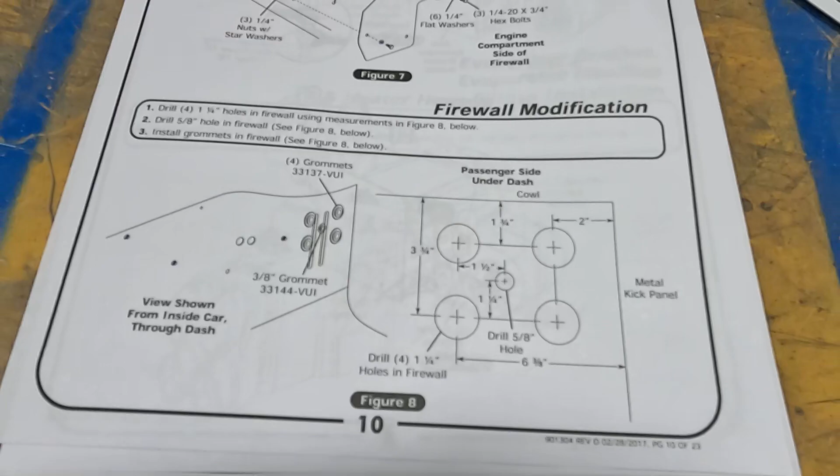Yeah, all right, yeah, there's the—I think this is what you sent me online, Doug, and I was like, I really can't do my measurements from that. I thought, what Dad said, there was a template that you actually laid on there and drilled out your holes. I thought that's what would come with this paperwork, but nope, it's just measurements. Yeah, I downloaded these instructions from the website.

And that's what I thought we could do, but I thought we're never going to be able to print it out to the right scale. That's why I didn't mess with it. I know, that's why we've been waiting to get the kit, but it looks like it's just...

Yeah, the rest of this is just the installation. If we do the firewall cover, I guess let's go back a page. Yeah, did you see something else we might need to do beforehand? You went back to it.

Okay, let's see—there's the dash, OEM control panel, OEM fresh air duct, this. That we can do later, up in the ducts and all that. But that front evaporator bracket, we probably need to put that on, and then make sure that's going to go through.

Is that the big plate that we just put on there? I think I remember doing that on the Mustang, maybe? Yeah, that's probably it—the big plate that goes on there, and then you screw that through, maybe through to this one on the outside.

Okay, what's this one here? This is silicone, on the back side of that firewall cover. Yeah, it's that thing—you flip it, silicone it, and then flip it over onto it.

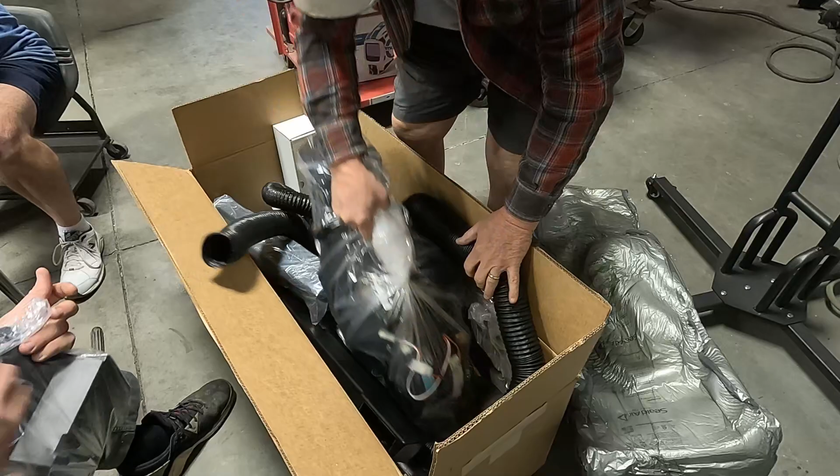On the workbench, install evaporator rear bracket and heater hose fitting. Properly lubricated O-rings. Well, I don't know that you need to do the heater hose fitting. No, but those little bitty short pieces of tubing, you can hook that up.

I mean, you can't put that on here. Yeah, but why lubricate the O-ring and have it sit for a year? True, I'm not saying you do that. What are you trying to say about my restoration, Doug? It's gonna take another year at least, before you're putting this on.

With properly lubricated O-rings, install front mounting bracket onto evaporator. Get this off of there. Okay, so where's theirs? Okay, there's the rear. That was down at the port.

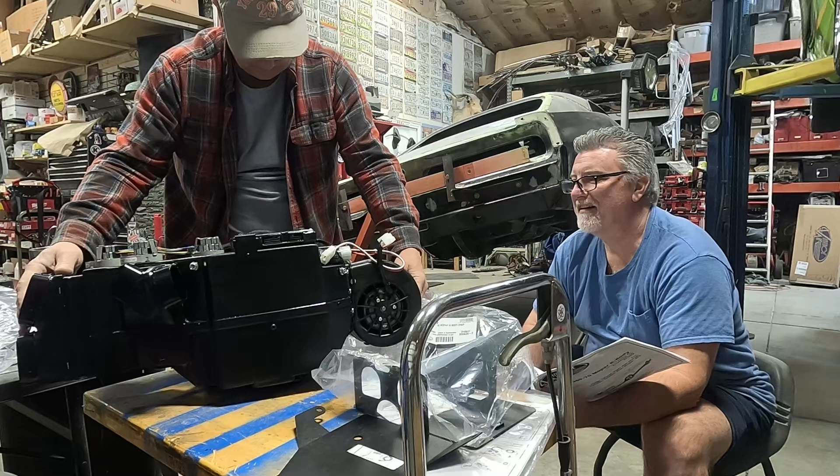Okay, this is the front side, so this is the back. I'm thinking this clamp somehow goes. All right, on a workbench, install evaporator rear bracket.

Looks like that hole lines up and that hole lines up. Sure does, this is the rear bracket. I was way off, what is the rear bracket? That's the rear bracket. This is the front bracket. This is the rear, okay. Well, turn it around.

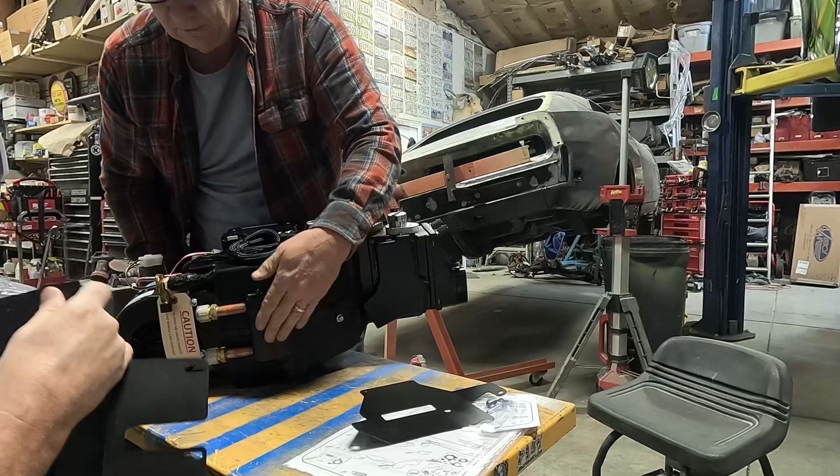Okay, are those metric or are they quarter inch by 20, half inch hex bolt? Yeah, but it's not a half inch, I think it's 3/8. It might be, it says half, quarter inch by 20, 3/8. That's the thread, yeah, 3/8.

Do you want the electric or you want to just do it by hand? We can do it by hand. Okay, yeah, it's plastic, you don't want to over torque it. So it was loose, go ahead and take that out.

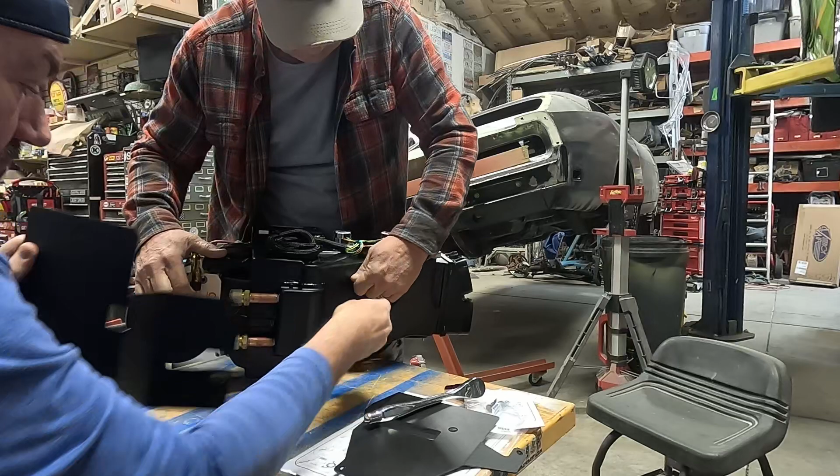Alright, give me a marker. Any kind of lock washer or anything go on these? Nope, it just shows them, the screw, pull them straight out in and screwing them back in. Okay, cool.

Oh, is the camera running? Yeah, so this is what we're doing now, installing this rear evaporator bracket.

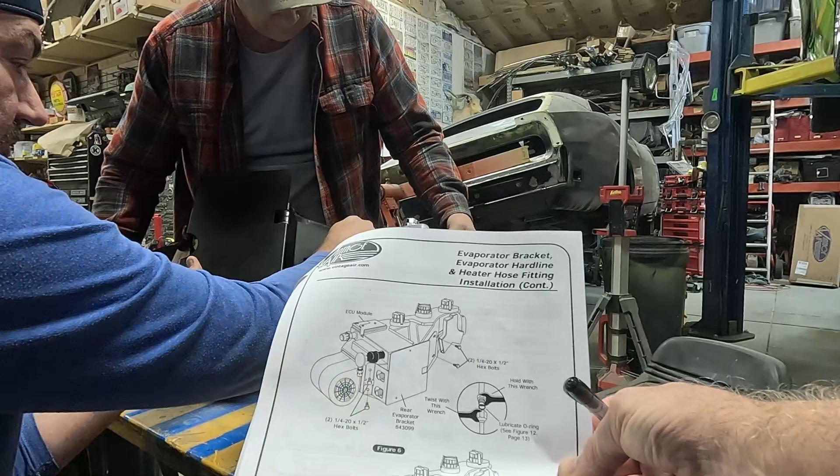Oh, that feels like it's cross-threaded. I don't like that one. It might not be. Yeah, it's going right in there. So let's just... I don't know if that's pointed on us or not. There we go. Much better.

Oh, the kid laid it down like that. You got another screw? Yep. It's like that will squeeze together. Yeah, I think it's got plenty of room to compress.

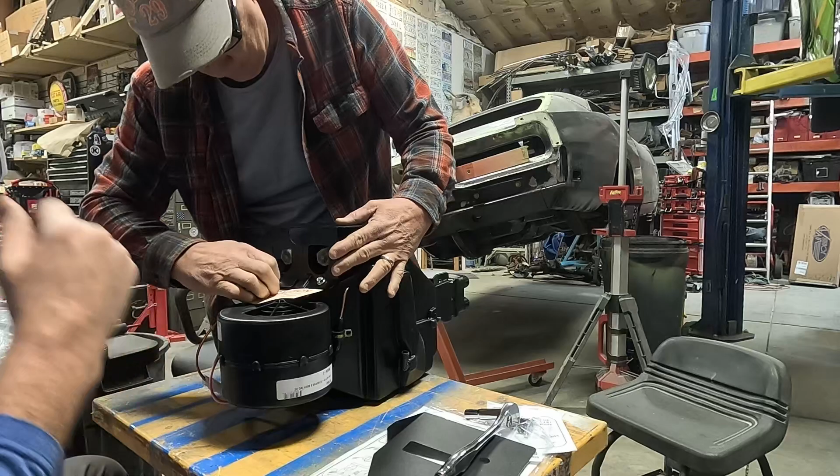Now we may need to take this off to put the hoses and fittings and all that, but I'd rather have this on. It actually shows putting them on before, after the block off bracket. But you can, well I was gonna say if you don't want, because that step does say install the bracket and then install the fittings with the properly lubricated O-rings. This is not, I think it might be cross-threaded. Oh, well.

There, now I moved it down. Thought you had it in there. Well, it started, but it's like, I don't know, we've got to maneuver it. No, not starting. I'll let you maneuver it.

Get off of me. No cursing at Clark's place, Doug. We're wholesome Christian boys. Crap. Shit, it's sliding. What are you doing over there? You about to bump it?

And now you got fingerprints on it. Well, but where you're gonna cut, I think yeah. It's still really wet, gosh. I finished a different project. Doug has to ruin it while it's wet. I was reaching to get this so you can see. I'd rather not see fingerprints in that. My project over there. Whatever.

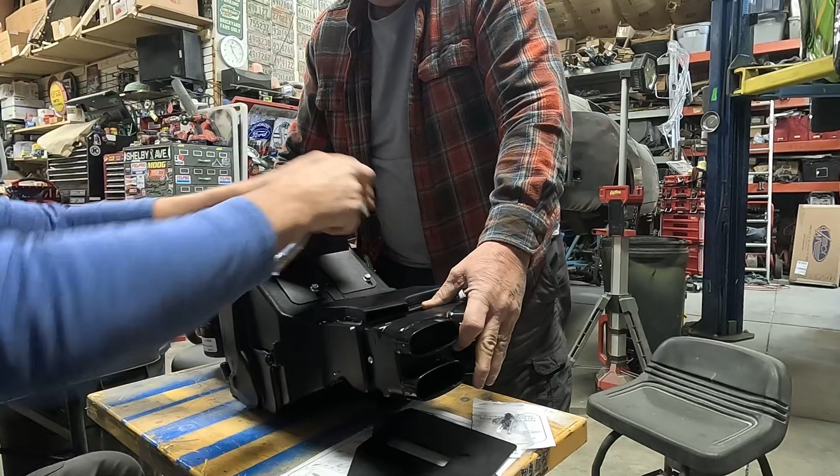All right, give me the damn... front bracket in. Now, how's this guy go? Hang on, let me get back to that page. I'm thinking that seems like those holes are close, but maybe that needs to flex a little.

You tell us. All right, install front mounting bracket on the evaporator. Okay, this is the evaporator control module, right? Yeah, and this plugs into that underneath your dash. The two things, are they down away from it, or are they closest to it?

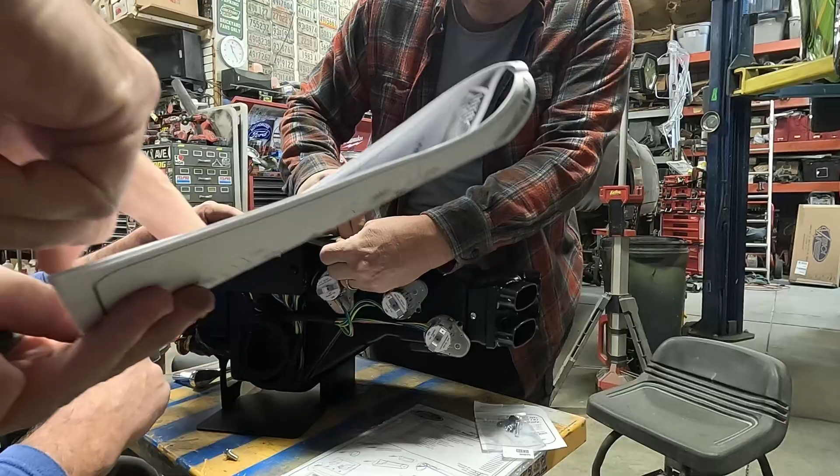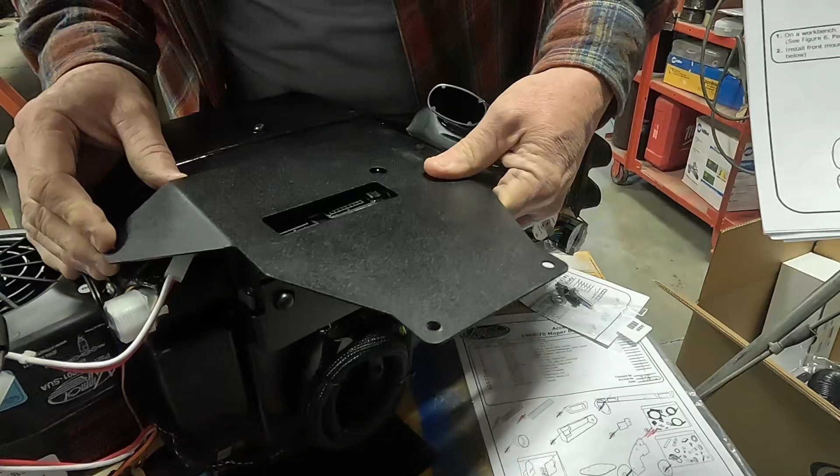Oh, you know what, I bet it goes just like that. Like that. There you go. Yeah, the opening looks like it goes. Let's see, looks like here, you can do that down. All the harness, everything plugs in through there. So yeah, your harness and everything there fit through that opening. Gotcha, looks good. And looks like you need to flex it a little bit to get it in there too.

Yep. Pop? Okay, that's not it yet. Oh, where's got that? Take the little pliers and just bend it a little bit, pop. Yeah, see, it's that screw. It's not centered over that hole exactly.

Well, right, maybe flex that a little bit. Yeah, that's the side that needs to be flexed. There, take that out, and I'll flex it real quick. I'll flex on you.

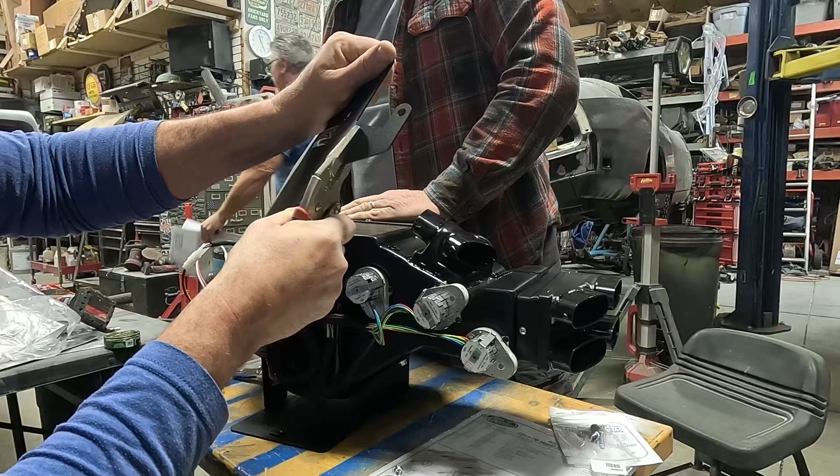Where'd that speckle paint? Spray paint, can you put it in front back? Yeah, it's on the shelf there. I was gonna retouch up my fingerprints. I don't need to be, don't need any DNA on me over there.

Okay, I kicked that up off of this. Yeah, it did. Let me get just a smidgen. And now our other hole is... you know what, let me flex this a little bit too.

All right, might be enough to get it where it's up off that. Where'd the other screw go? Should be right here. There it is. Sweetness.

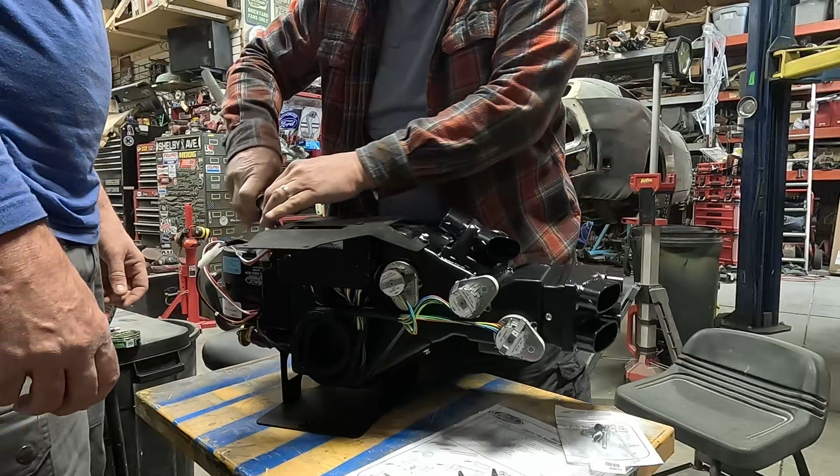Do it to it. Right in there, huh? All right, so do you want to put this? Whoa, that looks off. Look at this. Oh, no, never mind, never mind.

Do you want to go ahead and put these fittings on? No, I'm not putting fittings on because this is going in to the firewall. We're gonna see where it holds all the line, we're gonna get the plates in the front, whatever needs to happen, and then we're pulling it all out and painting the car. This mounts to your dash, all right, cool.

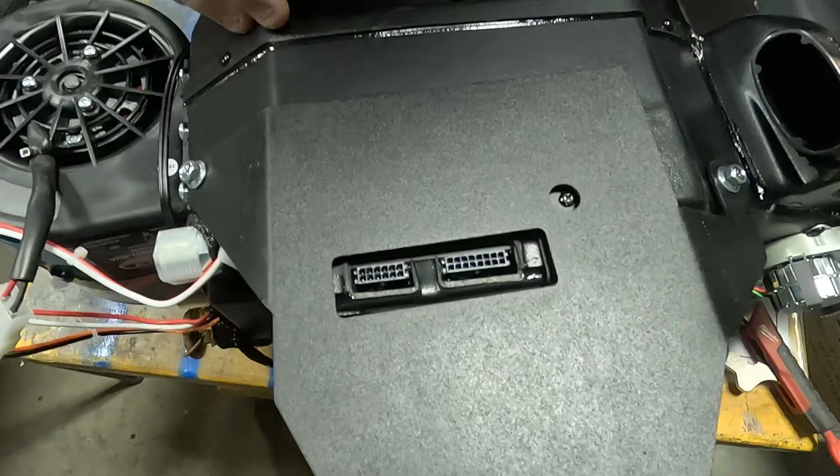Flip the page. I was just gonna mark these two off, and I want to show those. Pull that back over. Right here, oh, this is tight up against this. It's got a little bit of wiggle to it, but if I can't get my plugs through there, I'm gonna waller out this hole, waller out that hole, and slide that up about 1/8 of an inch or so. It might have enough flex in it, but these loosen this.

Is there any give in this at all? I don't know. Why don't we do it right now?

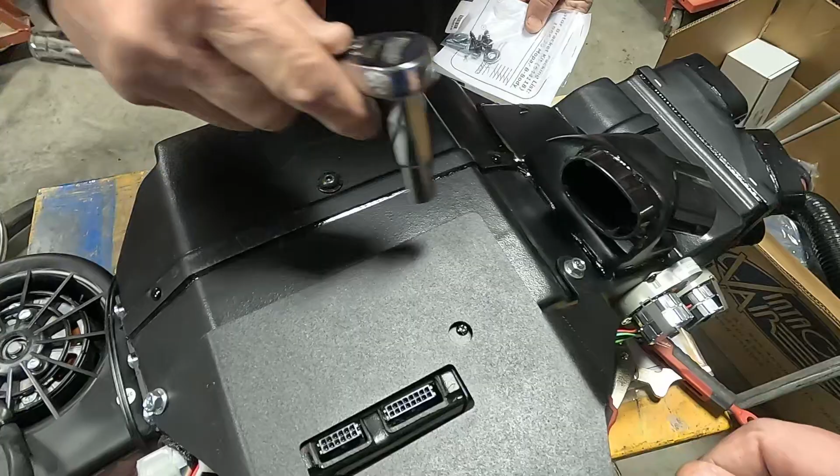Yeah, that's not going up any higher. See how this plastic is keeping it - or yeah, this looks metal? Like it's crooked.

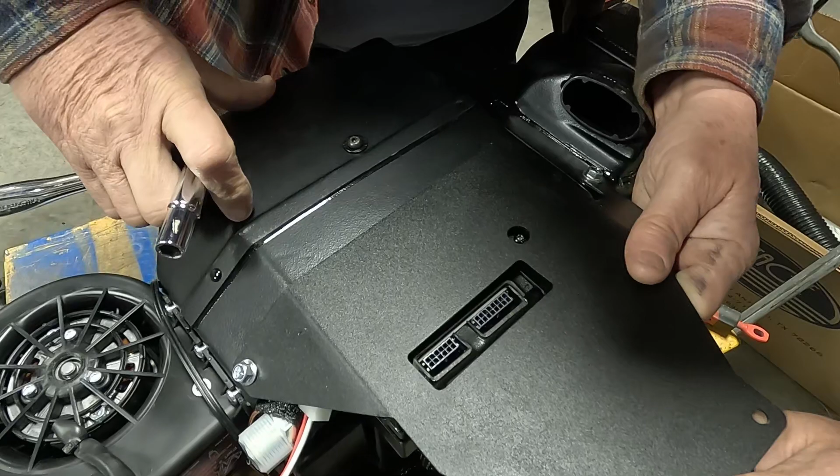It'll be fine right there. But the way it lays there... where's the plug? Let's see where it's at. I can see the plug's not going to be right. It's going to be mashing itself against this metal.

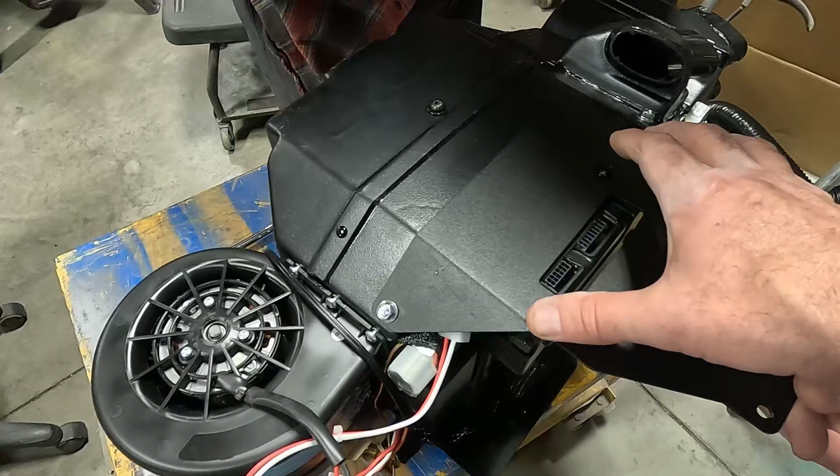So let's modify it now. Let's round out these two holes and push that up just a smidge. Especially this side, it's a plug like this.

They're very easy to put in there. Careful with your chair, you don't want to bump that so it slides off again like I did. Let's get the chair out of here.

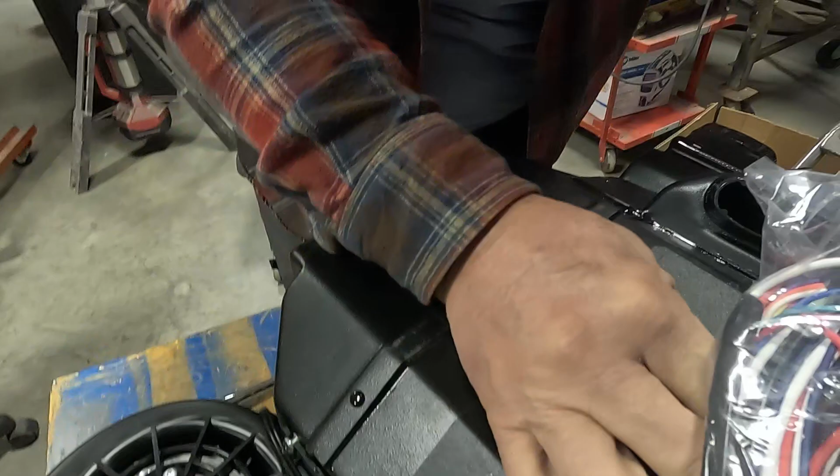Get the camera back around here. That fits in there fine. Yeah, I know, you're lifting it. No, you can push it down - that's where it is, and it's riding up against that.

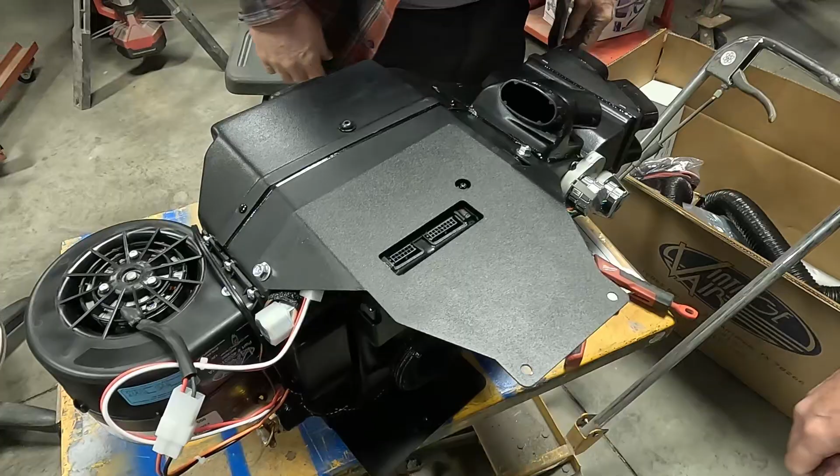It's gonna short out every one of those connectors with the metal. I don't want that, let's just round out that hole. And I'd round this one out too because it looks tilted this way. Yeah, it is, and that'll bring it down that way. Okay, so we're gonna round this hole, round that hole more than that hole, and then it'll kind of cock up, and this opening will be in the right spot.

So while we do that, take a small break.

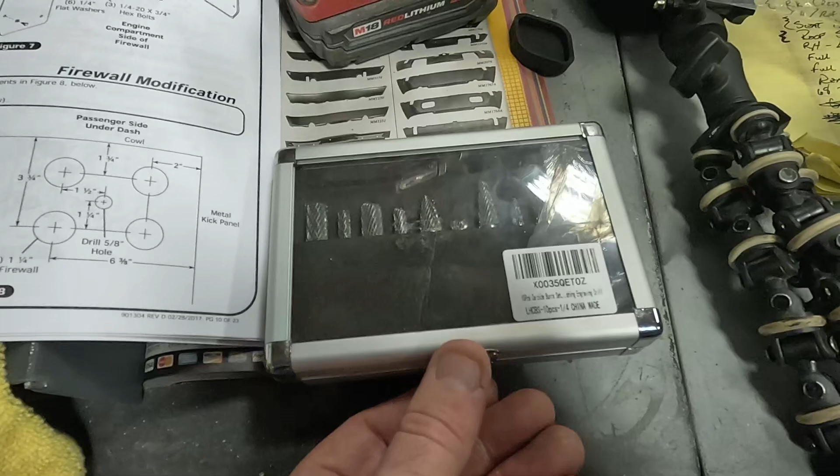What do you think about this guy? Can go in there and round it out pretty good. Yeah, that one would work. All right, we'll try it, we'll see how these work.

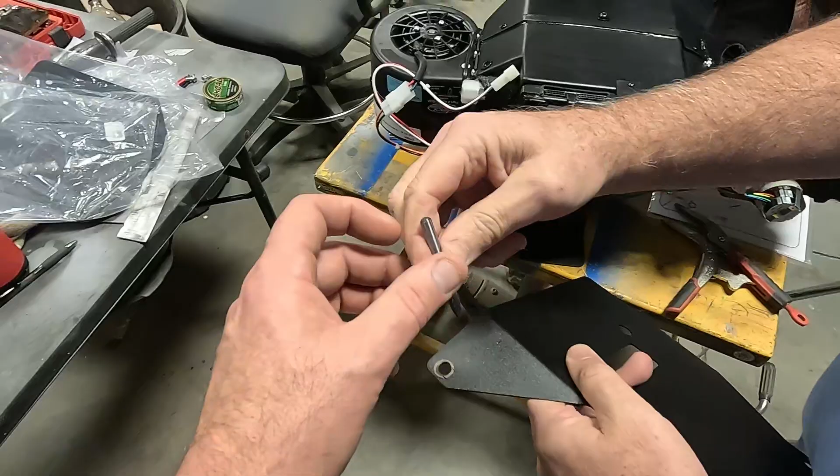Good stuff, now look at our clearances. Yeah, look at that, it'll be down that way. Yeah, it allows it to wiggle. Sweet, yeah, better.

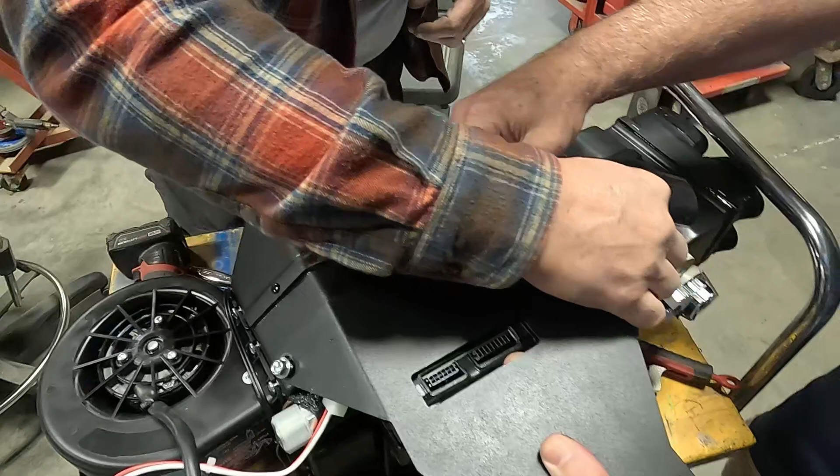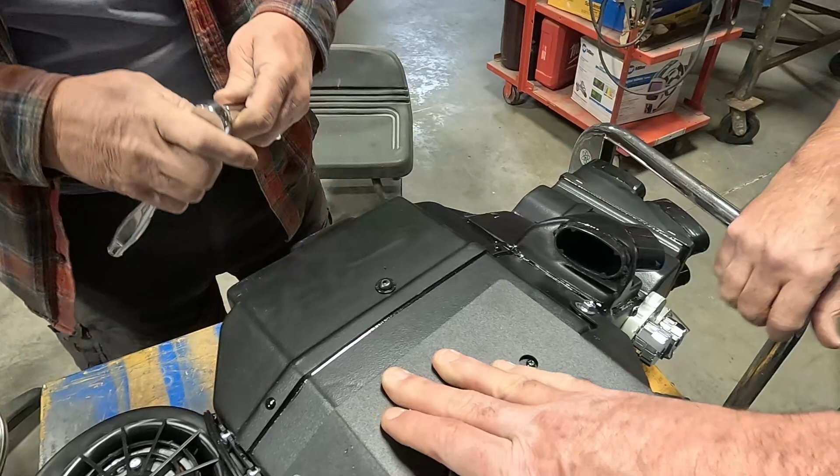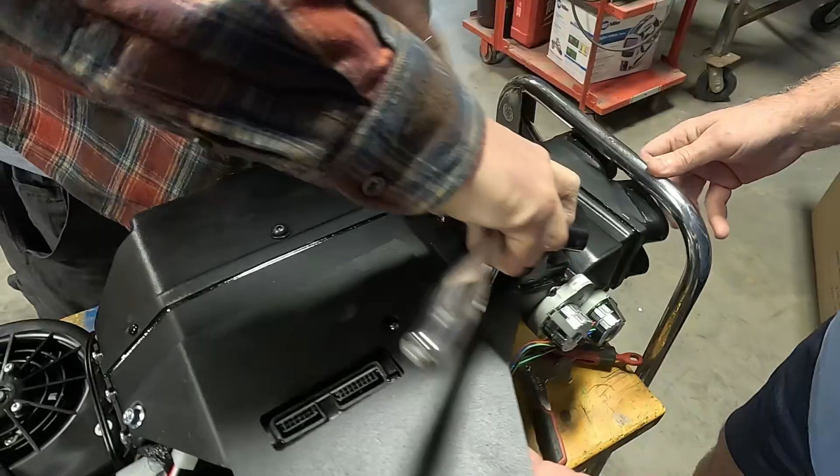Lines this up better too. Yeah, the screws now down just fine, plenty of room. Look at that, straight in, is that it? We'll stop right there. Okay, now what's next on it?

We're gonna need to know what these are for. See, that's with the kit. That might be to mount it to your car. Oh, maybe - those two, unless. Those go through the metal. Yeah, that's going to be probably these.

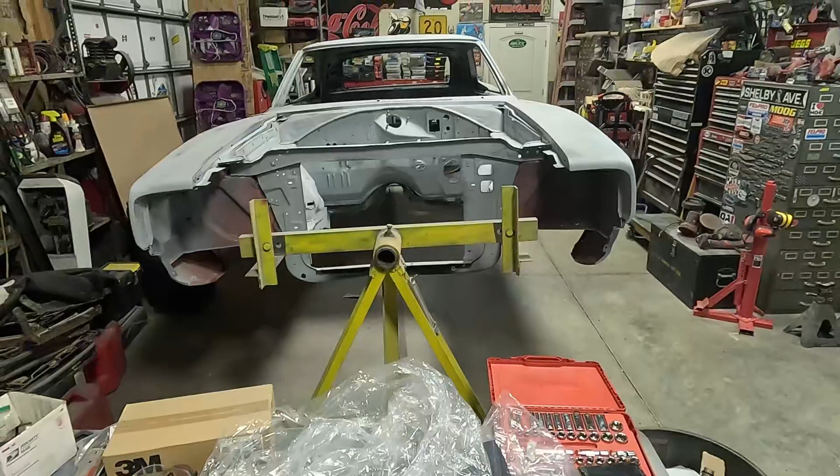I'm just spitballing, I don't know that that's a fact. Yeah, and then there's got to be another one. Don't have any OEM wire clamp from the firewall. Yes, we do, okay. These two - so this OEM clamp is right over here, need to remove that.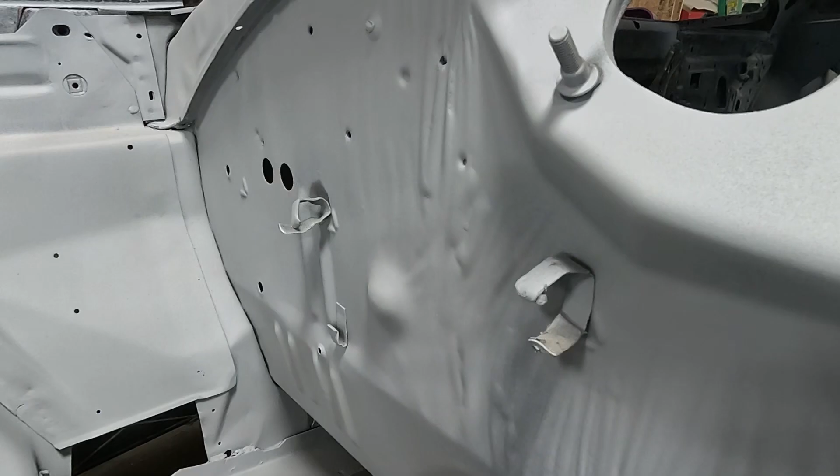And I think it does get in the way. You see that guy there, Doug? Oh yeah, yeah, it says remove it. Yep, ensure firewall surface is smooth. It's showing it kind of up above one of the holes, but mine's kind of to the side. But when we put that plate up there, it was definitely in the way. So it needs to come out of there.

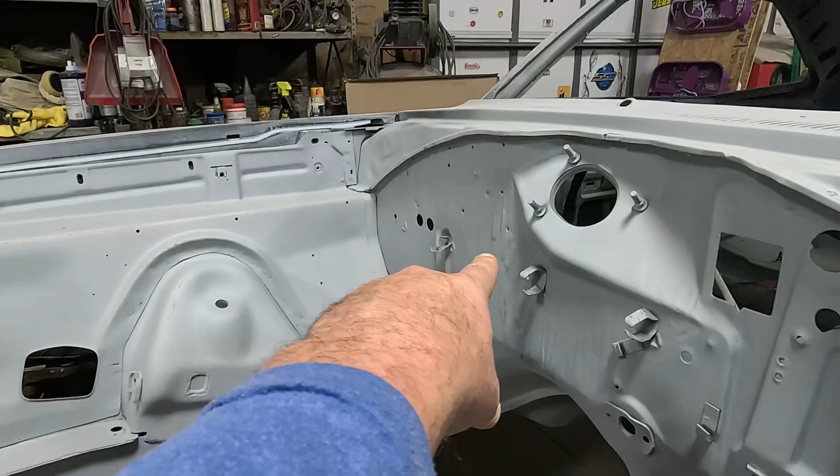All right, I'll do that next. Go in here - when you say those go in there, oh, they're kind of capture nutted, huh? I think it's like... so is that going to be a screw from the front? It may have - yeah, it's that.

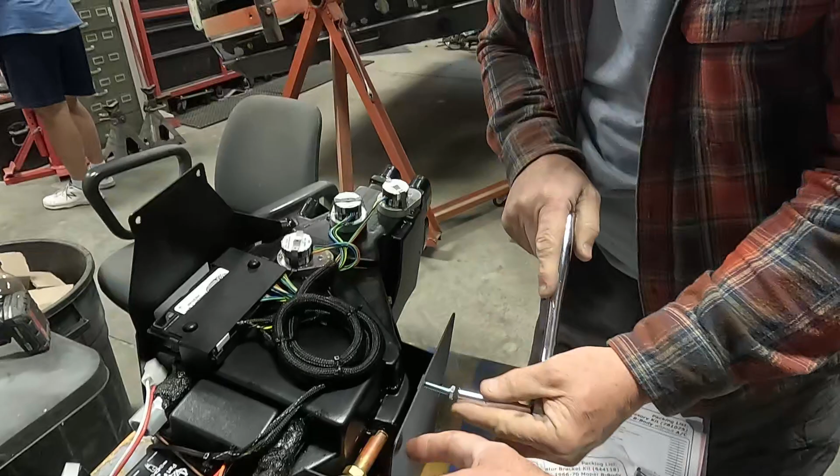Whatever coating is that goes on them. Yeah, that's what I'm thinking. Whatever - lysine or xylene or whatever. Yeah, whatever that black coating is that goes on everything.

There it is, yeah, let's thread it through now. Yeah, I'm just doing it by hand, so it's fine. Okay, cool, and I see another one down at the bottom there. Yeah, I'm gonna clean it out too, get it tapped, like we're retapping them.

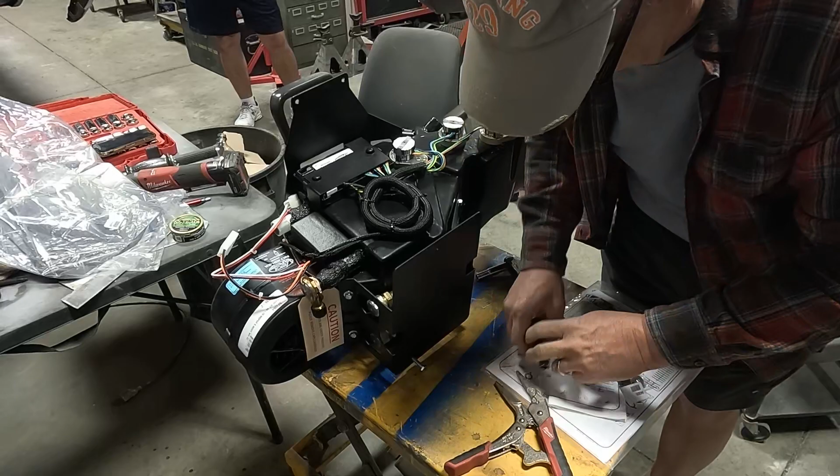Because it's painted or whatever, like you say, whatever that coating is. I forget what that coating is. If you know, comment below.

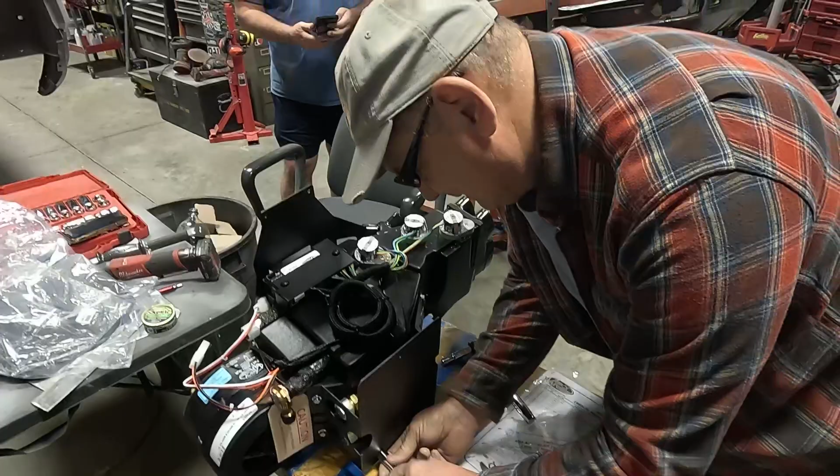People say it's paint, you idiots. It's paint. Well, I think it's an electrified process that they use to coat all that factory stuff.

So this is a pretty small piece. All right, we'll be back after I grind that off.

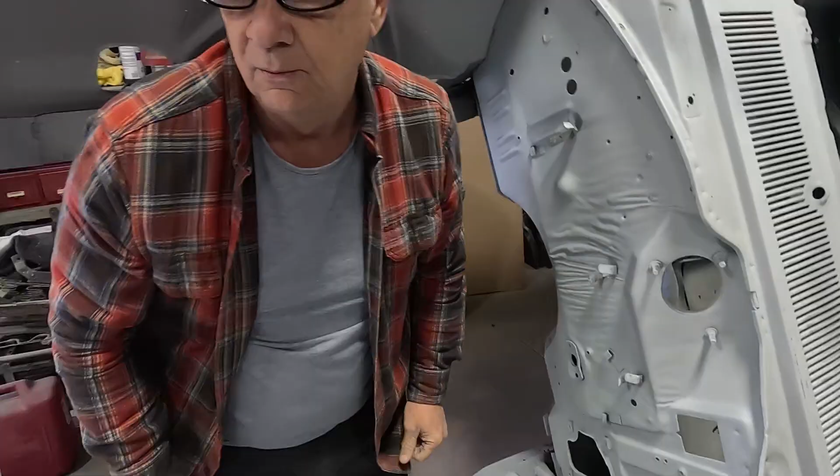That's got to come off first. I didn't want to just keep pulling because it may break. You want to get a chisel or something underneath that? How do you want to cut it? I'm going to use the spinning wheel of death, then grind it flush. Cut the legs off, then put it in the cut-off grinder and grind it off. Cut this one off first, then cut this one. Okay, I think we'll do that. You want me to do that? Yep, it resonates inside - it's vibrating on there too.

It's hot. I'll bend it up. There you go. That looks good. Now we might just take the sander to it. Well, you could have done it with this. Yeah, that's a little less dangerous.

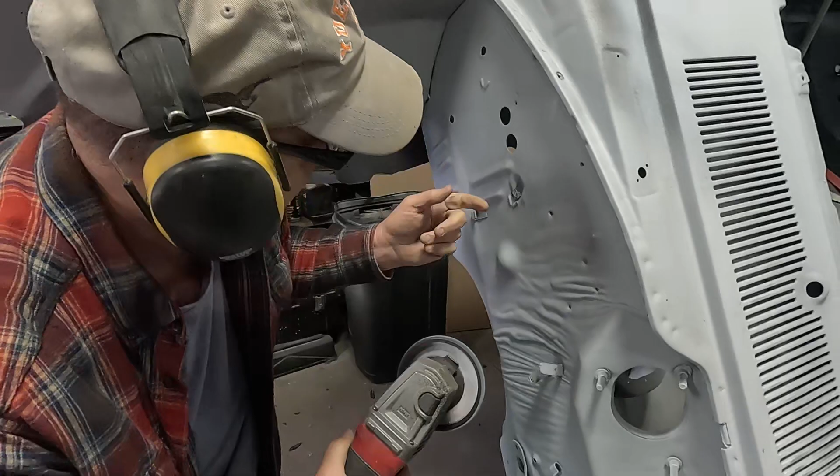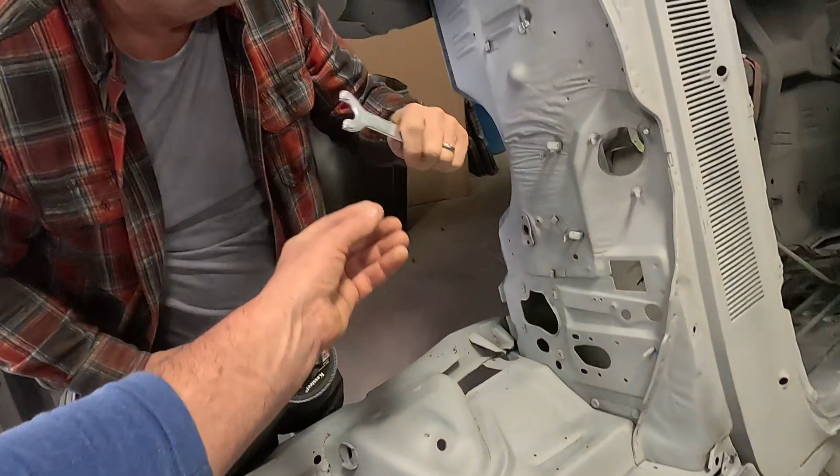Yeah, coming the other way. Pry that up - we can. You know, a screwdriver or something? Yeah. Oh, they're right over here, Doug. Never mind. That might be enough to grab underneath it. Maybe not, I won't grab it. Which one? I think he's got screwdrivers up here. You want a longer handle? Yeah.

Actually, there's not much left there to grind. I see.

That's probably good. Bless you, thank you. Yeah, I think that's probably good, as long as that plate will cover it.

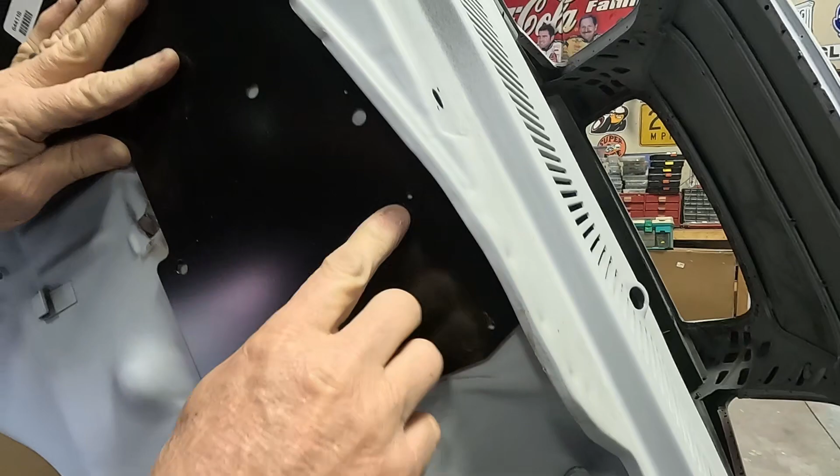Look, it doesn't even hit it - see, it's actually beneath the plate. Okay, those screws, they all line up with the holes. There are holes for all of those? Yeah, see those little holes? Okay, those three holes are OEM holes.

Yeah, and a couple washers going into the hole. One, two, three OEM holes. And along the top there's 1, 2, 3. Yeah, these three holes line up. There's another one over here - you got one for that? The only thing that lines up is those three holes. None of the other ones - oh wait a minute, no, there's no other holes that line up.

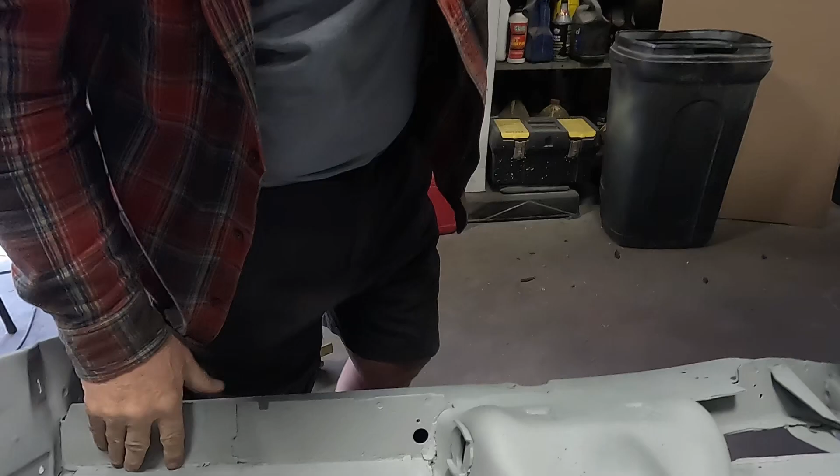So you're going to have to screw this in, hold it, mark those, and drill them out. Is that right? Well, it only takes three. Using the firewall cover as a template, mark and drill four 3/8-inch holes into the firewall. Okay, so there's four of them. Yeah, so there's going to be 1, 2, 3, maybe 4. I only see 1, 2, 3 that are going through here.

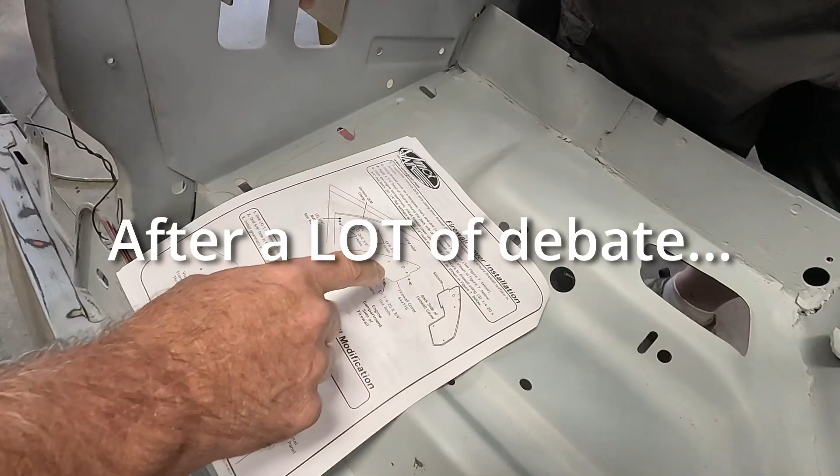1, 2, 3. Yeah, I only see the 3 there too. What's this one? Oh, it's this one, isn't it? Yeah, these go through, because these two top guys are... drill four 3/8-inch holes, but it's only - see figure 7. Where's figure 7? This is figure 7. Okay, I only see 3. Well, there is a hole there too. Yeah, but it doesn't show it, and they're all the same size. 1, 2, 3, 4 - those are the 4 holes.

Oh, this one has a hole already. I see it - maybe that's why they're only showing the 3 that you need to drill. It's not going through the big hole. It's going through the small hole over here maybe. No, it's not even showing three - it's showing one down there. There's that one, and then there's this one. It shows one down here.

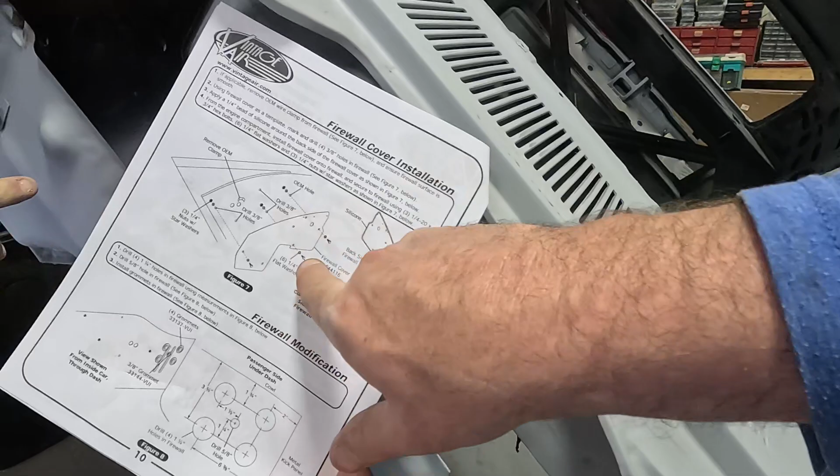See, you got the three tiny ones across the top - 1, 2, 3. It shows one going through the middle. Pull that down some. No, it shows one right here, Doug - that is right here. And then there's one here and one here. You see? Yeah, that's how you need to look at it. Is that this one? Is that one - that one here is down there.

And the other one's the one way over there. So what about this one? It doesn't show that way - doesn't show that one. It shows the hole, but not this one. All right, and do we have that one?

A 3/8 bit? Yeah, I got a 3/8 bit. Okay, back in a bit.

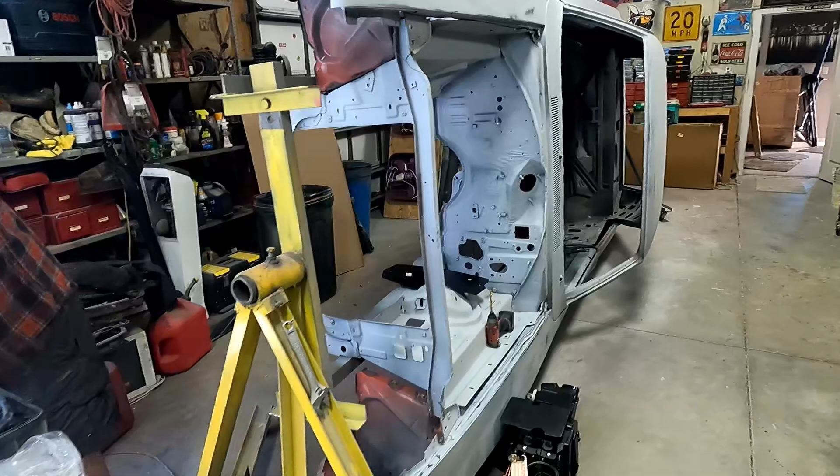We're old school, old guys that think all the hoses come through here, so we were thinking drilling here. Reading the instructions, it says to come 2 inches off the kick panel, and that's where you're supposed to start. We're like, well, that's gonna put it in the wheel well.

So what's going to be very cool is all of your heater hoses are not in your engine compartment anymore. The Mustang, it was that way - they were in the engine compartment, correct? Correct.

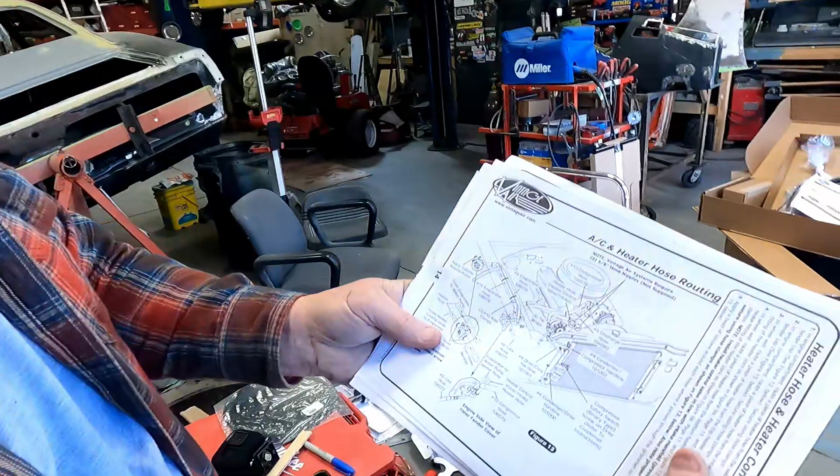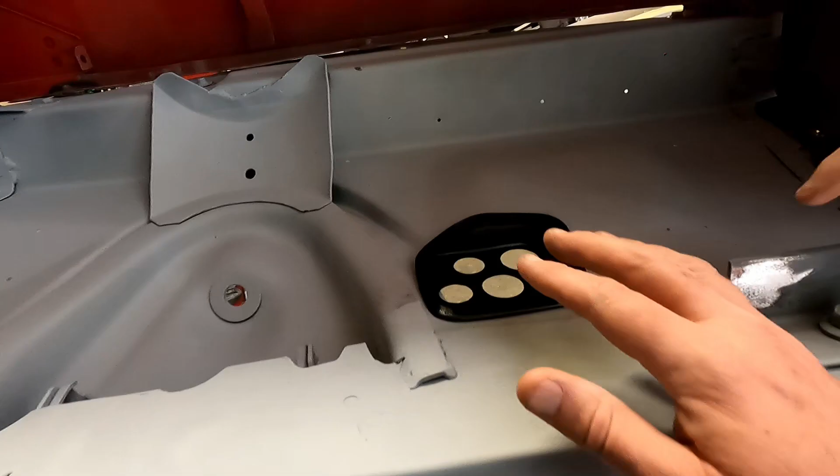Here's the hole we're punching out. It comes out, there's the brace for the fender. They're going to come up inside the fender, out of the engine compartment, and then go through the side plate, which is for the camber adjustment. This plate now has your heater hoses going through it, and your hoses are going to go in there, so they'll come out.

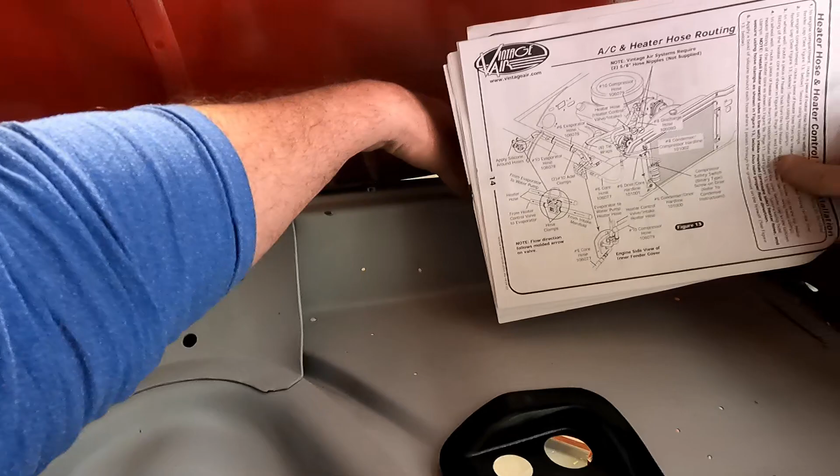It comes around out, and somewhere around in here I think, comes out, up, follows along the inside of the fender, and down and through for a clean look. What do you think?

It's gonna be cool. We're going to get a clean engine compartment look.

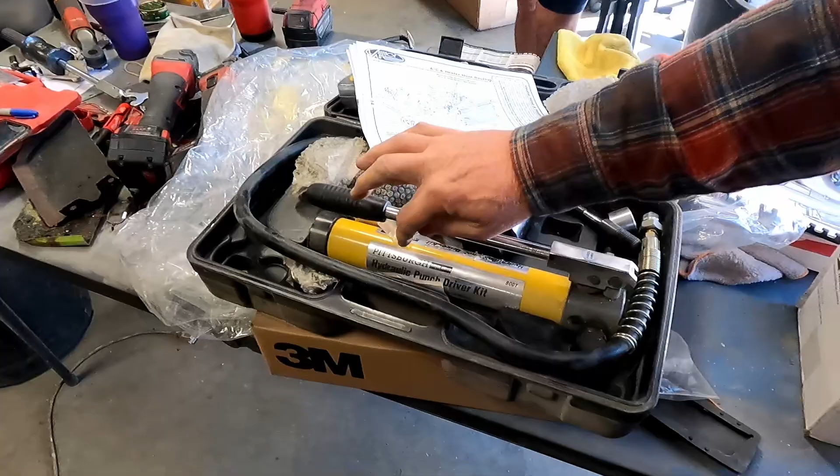We're going to use this - not everybody's gonna have this tool, it's a hydraulic punch driver. Crazy man has every tool, but this one will do your 1 1/4 inch holes, correct? Yes, that'll pull through, and it'll turn out being like this. Here's how nice the holes will look.

Very cool. So, all right, we're gonna do some of that work, cut some holes.

Actually, that's an original cowl front area - I didn't replace this panel. This is new, but that's old. Cool, so I'm glad we're doing this now and not after paint.

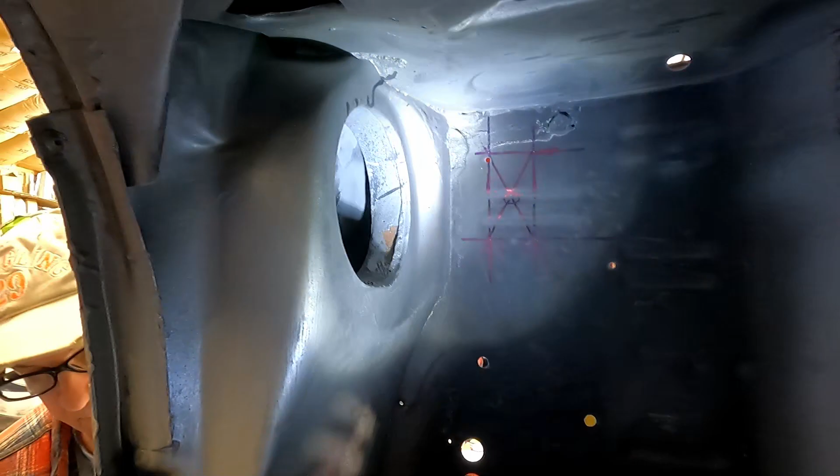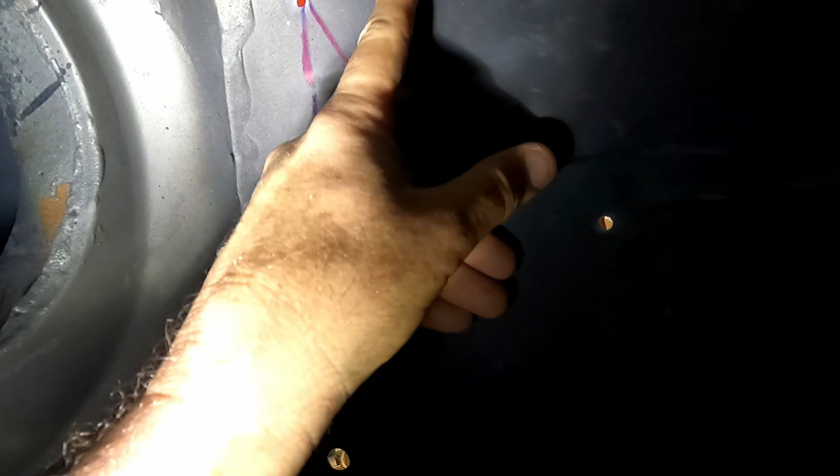If you're doing this, there is underneath the cowl intake, not where these holes are, but all the way up over here. We've measured our 2 inches down and 4 inches down and whatever, and Pops just went ahead and put an X across the center to find the center. Then I went ahead and hit in the centers of all these.

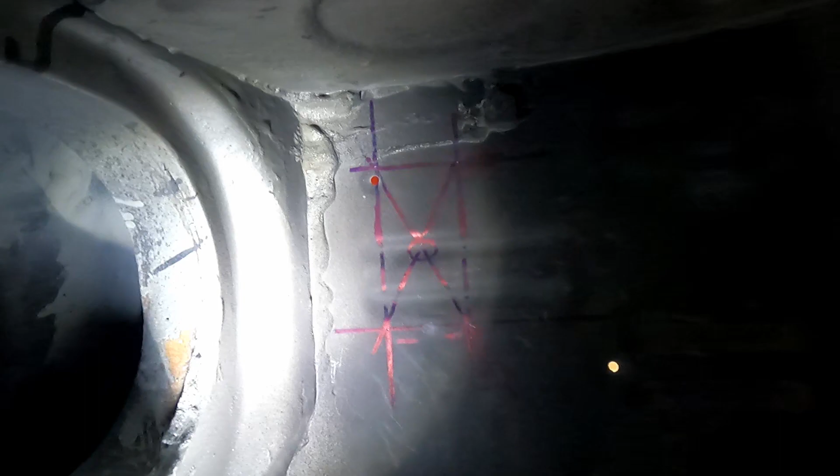We've got to drill a hole wide enough for our punch to go through - 1 1/4 inch hole. Yeah, that's a big drill bit. So a 1 1/4 inch hole in all those X's.

You can see from the metal kick panel, we're over 2 inches. We're down 3 3/4 inches, and then Pops put an X because we thought that was pretty close to the center of it.

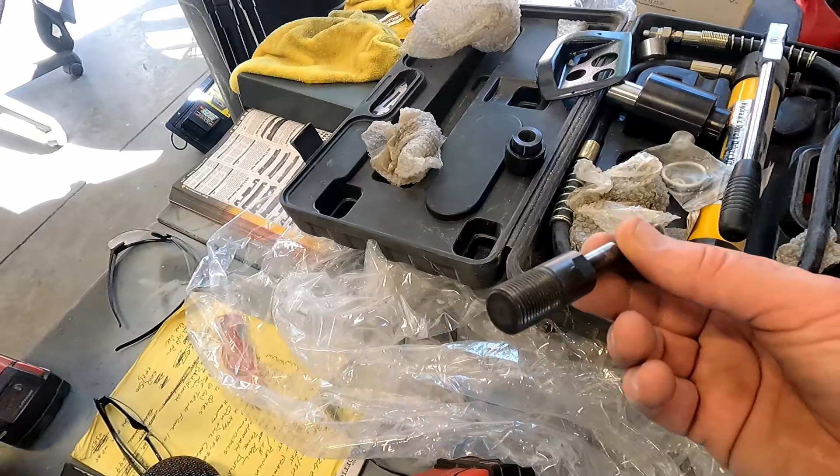So we're going to drill a pilot hole, then a bigger hole for this monster - is what it takes to be pulling these dies through to make that inch and whatever hole. But it should make some nice clean holes. We like nice clean holes.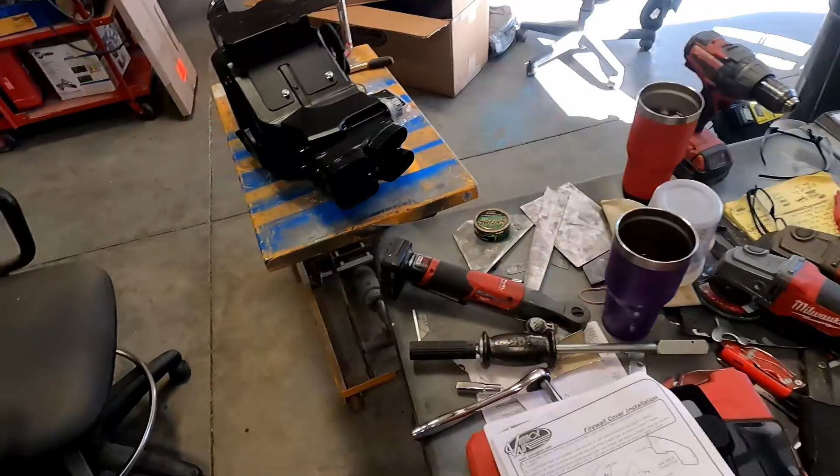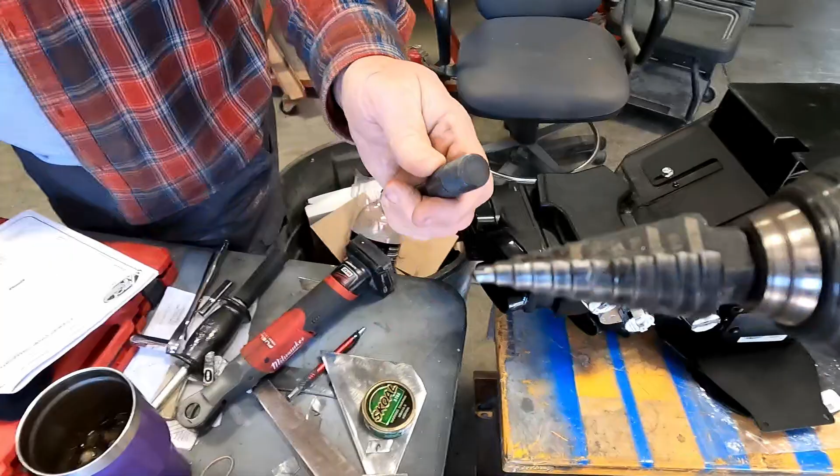All right, this looks like a 13/16 Milwaukee step bit. We've got our pilot hole because that is what size it needs to go through, and because this goes on the back side of it and pulls it through the metal.

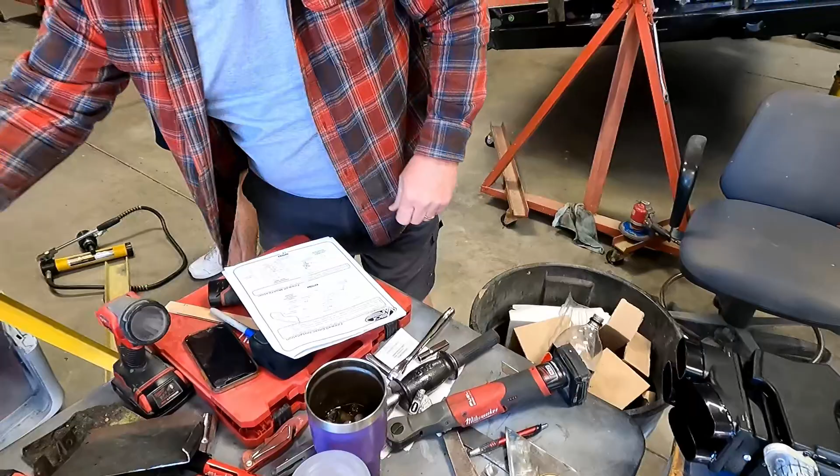Those are some serious bombs. Can't blame you - yeah, that was a boom. I'll be able to see that on the waveform of the video. Boom! All right, okay, plenty of light.

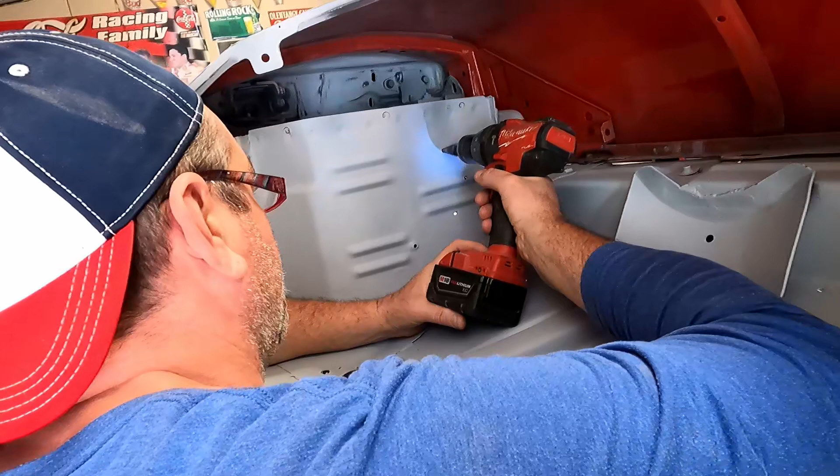I don't know, let's bring it down a little bit.

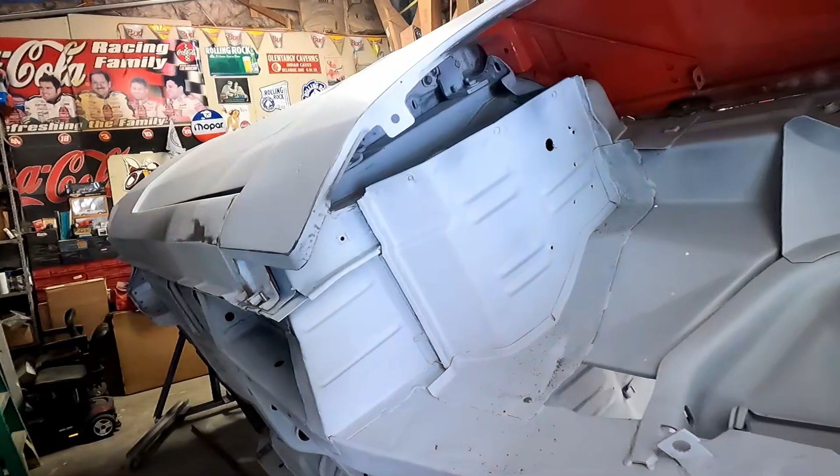Make sure that's big enough. Test and see if that goes through. Ooh, a little more cleanup, a little more.

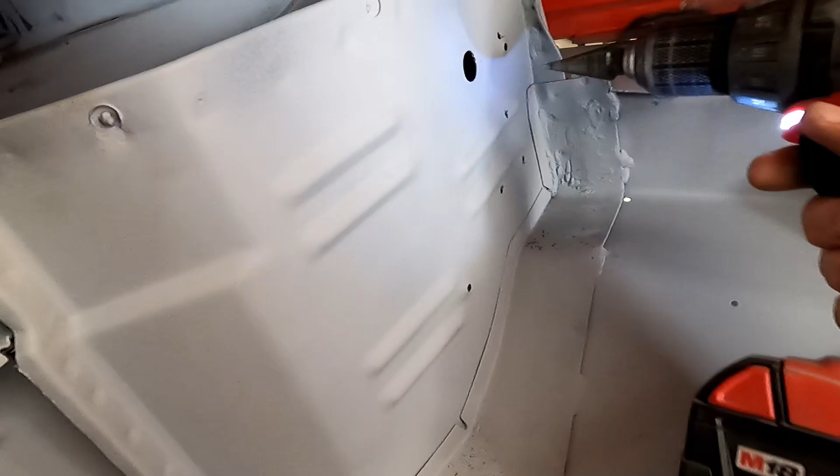Okay, that's to the next, to the last. That's good enough. Oh, I wasn't even filming. I'm taking after... no, my father. You're filming, I mean I wasn't pointing the camera at it.

You know what all that smoke is from? That's all the undercoating and stuff heating up, almost like tar catching on fire. See all the black and stuff? Yeah, that's all that platinum stuff I put in.

See if that will go through. Looks a little small. Oh, it's good.

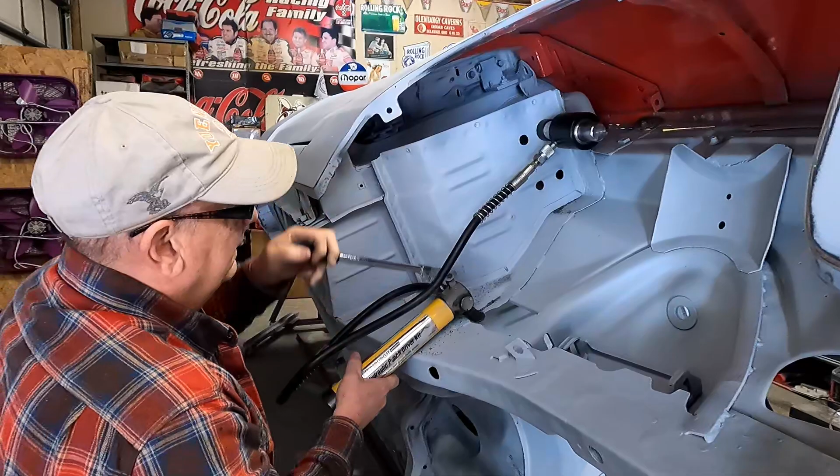Yeah, but that makes a 1.25 inch hole. So stick this through, and then Doug's on the inside screwing it on. Get out of my charger, you're doing all that screwing in there. All right, we're snug. Then you tighten this and pump it, and what it does is it draws that up and pulls that through.

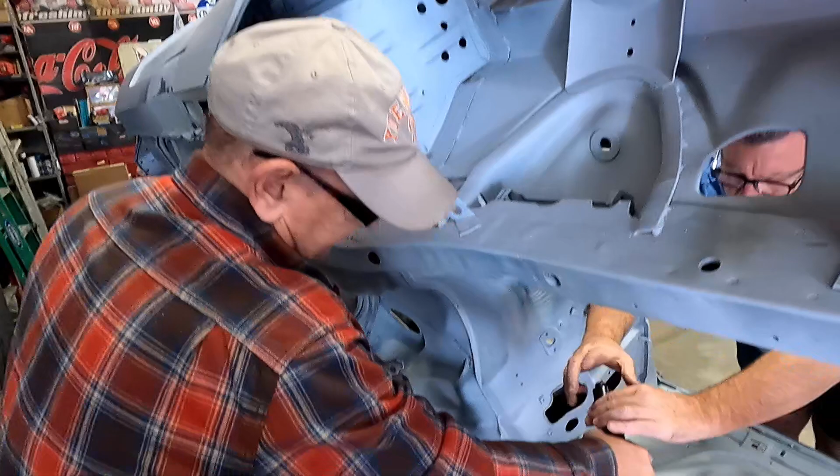Look at that size hole. All right, you gotta measure that, make sure that's 1.25 inch. I'll unscrew this maybe. Yep, and then your slag comes out, I pull that piece up and drop the slag out, or the ring.

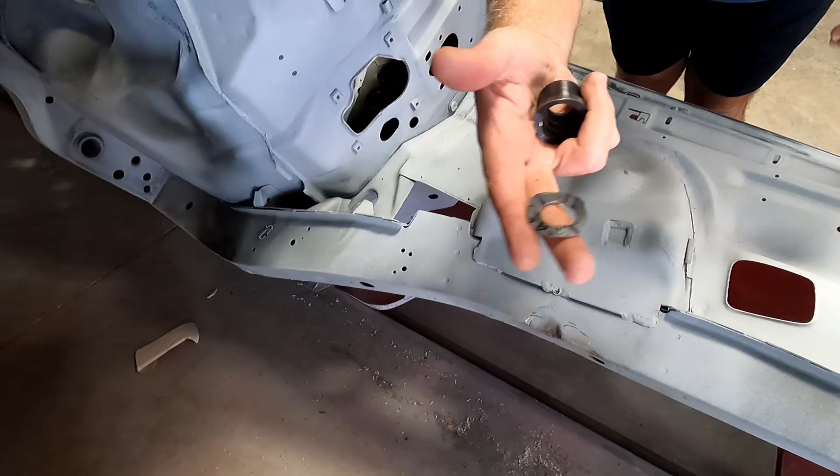You can put a hook on this, hang these as Christmas tree ornaments, or make earrings out of them. Yep, they're nice, nose rings.

Now this one will be weird because we're on that cut. Hang on, you gotta loosen it. Yeah, I opened it up. Okay, if he's got it snug, it's tight again. It should still cut through just fine. Oh yeah, it will.

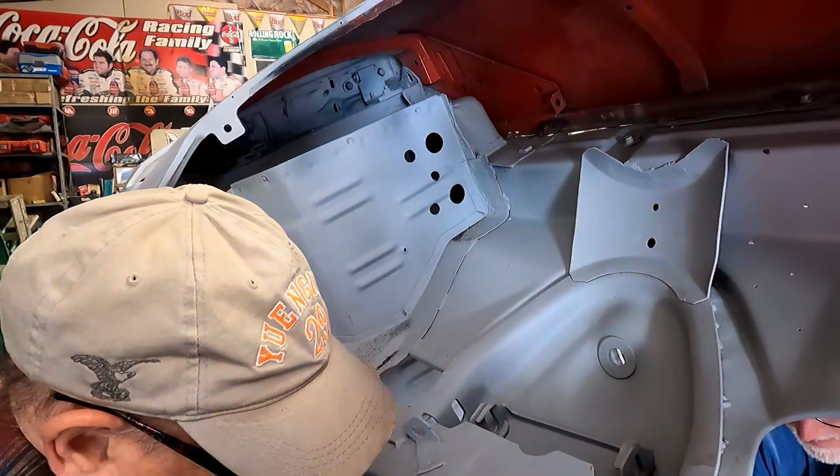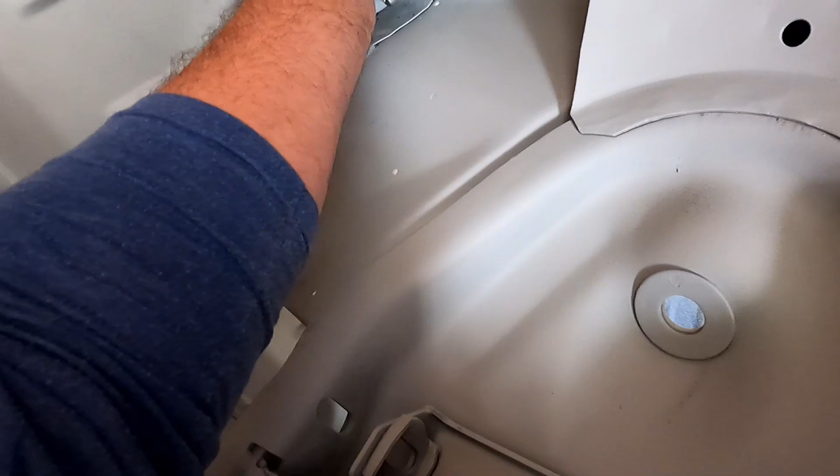I heard it cut it. Yeah, looks good. Oh, I meant to measure the hole. Well, this is the only thing we've got to do it with. Looks like about 1.25 inches, and that's what they called for, right? Yep, looks perfecto, and it didn't distort the whole firewall. But if you tried to cut a circle out of that, this would look horrible.

All right, pump away, pump it up. I would not want to be doing this on a painted car. No, me neither. Is it done? Nope, keep it there. Had one little hanger left. Yep.

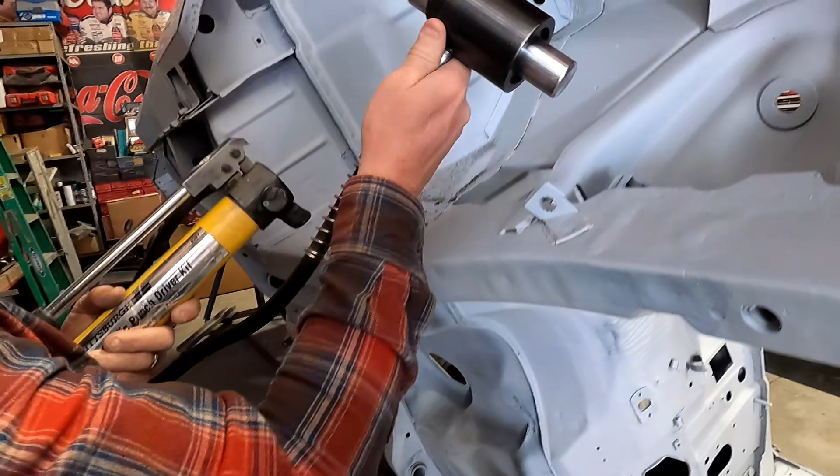You've punched quite a few holes with this little kit. Yeah, I have, and it's been like... You need this back. Oh, what? Oh yeah, won't cut much, will it? I got this top.

All right, he's going for it. Last hole, he's going the distance.

I have never seen a car with the heater hoses run out through the... You should be good. No, keep going. It's got a little... there we go. Just had a little hang up, little hangnail.

Now our grommets go on there, and that's gonna be cool if that's all painted around, looks finished like we did custom work. What did we do this, Chris? It's kind of oily. I don't know, oil, I don't know. It's weird how the dust settled on that. Weird. Yeah, I could have gotten oil dropped on it.

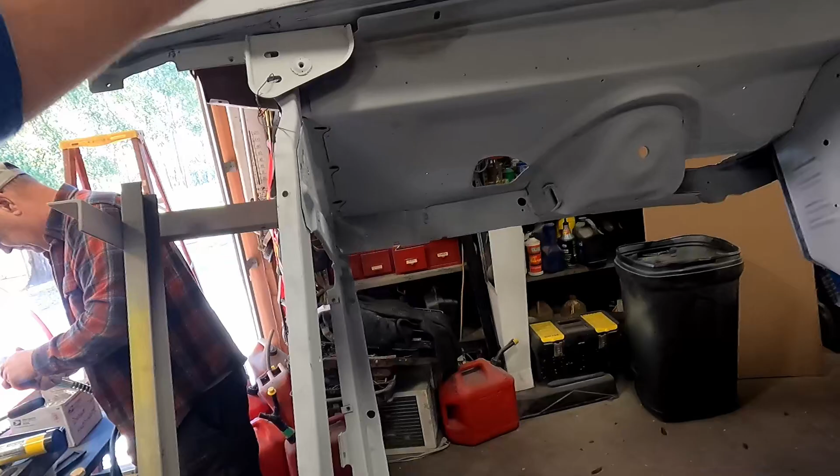I still need to clean everything before we do paint, a couple times.

All right, so I will probably do a couple videos in a series to do the vintage air for the '69 Charger, but those were the main things, those holes that are actually in the fender and not up in there. So I'll probably do a couple videos in a playlist for the vintage air install, like Pops did for that one, and I think you probably did for your Mustang as well. But now we can finish body work and get her in paint, and then I'll continue this little playlist once the car's looking way different than it currently is.